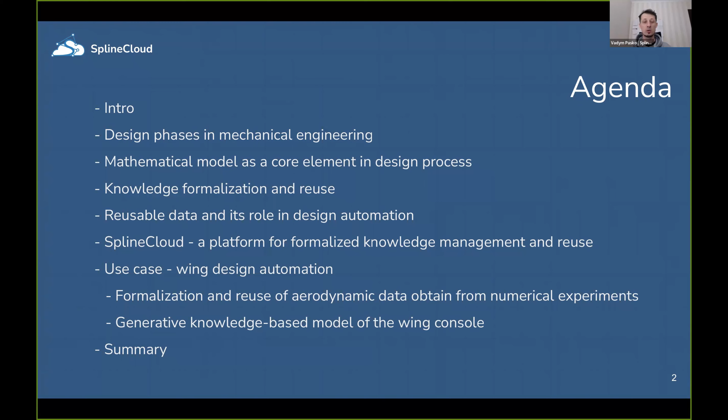Let me first speak a little bit about myself so you have a better understanding of who I am and why I'm talking about this today. My name is Vadym. I have experience as an aerospace engineer. I was working in the state design office Yuzhny for 10 years—this is the largest space company in Ukraine. I was always working on conceptual design phases, involved in numerous projects, from unmanned aerial vehicles to aircraft, space launch systems, to lunar landers. I was also involved in exotic topics like the space elevator, and many more. So basically my career was always related to conceptual design.

Conceptual design is when you turn an idea into a digital prototype. From my experience, this problem is really not trivial to tackle, because there are no standard ways to conceptualize your ideas—there's always a high weight of creativity here. At the same time, there are some patterns that, when used efficiently, can simplify this process. This is what I will talk about today.

Let's focus first on the very global aspect of things: design phases in engineering. Especially when we talk about conceptual design, because there are later phases—design for manufacturing, product lifecycle management, and other things we will not cover today. We are focusing more on conceptual design—when we turn an idea into a digital prototype.

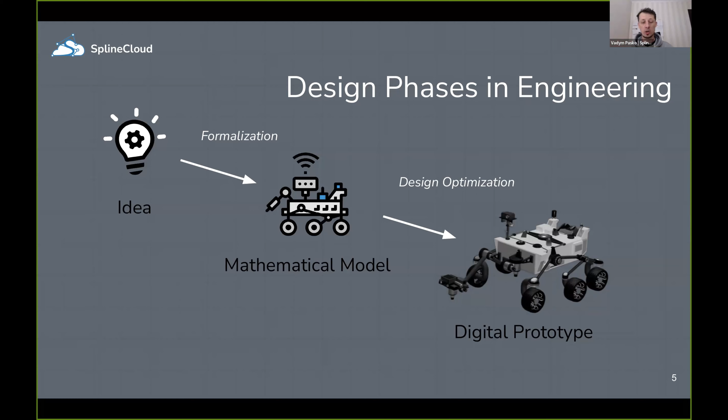So it is very important that we focus on the mathematical modeling process and make correct mathematical models that answer main design questions. So what is mathematical modeling in engineering essentially? You may think of a mathematical model as a set of equations on paper, but we live in the digitized world, and usually now we think of a mathematical model more as computer code.

So we incorporate existing knowledge from different domains, best practices, our experience, data on material specifications, some experimental data. All this we collect to derive a mathematical model. And during this process, we usually face the need to discover new knowledge, which in engineering always happens through experiments, either numerical or physical. There is also a share of statistical data that we can incorporate into our mathematical models, but I will not focus on that today.

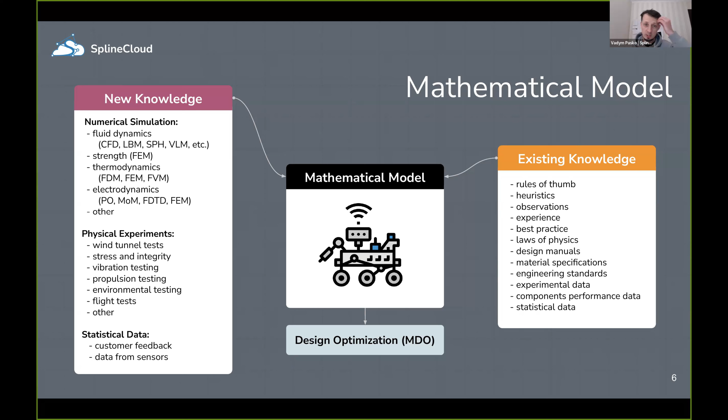So the idea is that when we don't know how some part or system behaves, we go and decide to conduct either a physical or numerical experiment. And this new knowledge also has to be incorporated into our mathematical model to amplify it and add the required data. And this mathematical model, once we have defined it, we can use it for the design optimization process.

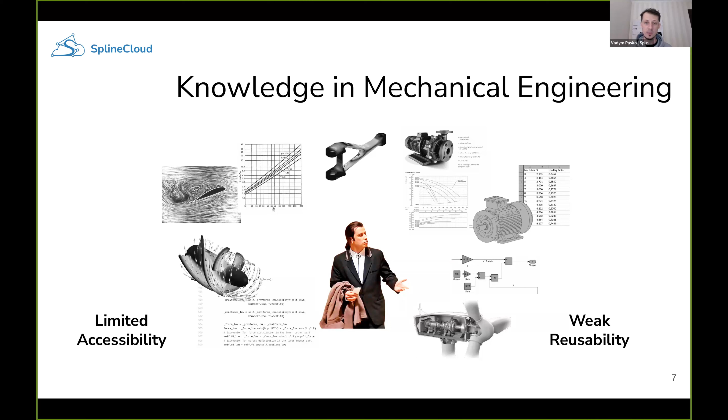But in engineering, it happens so that knowledge comes from various sources and in various forms. And you can really get frustrated by how to convert all this knowledge into mathematical models. Engineering software that we currently have complicates this process because of proprietary data formats and closed corporate ecosystems. We can say that, in contrast to other domains, engineering knowledge lacks accessibility and has weak reusability.

But to understand this, what is reusability, right? We should understand the process of how we can transform knowledge into a mathematical model. This happens through the so-called knowledge reuse process. So there are two general types of knowledge: it's either explicit knowledge or tacit knowledge.

It's knowledge in engineering. Explicit knowledge is simple: it's either laws of physics, design manuals, some engineering standards — something that has a written form, something that has already been covered in some documents. While tacit knowledge is something that wasn't really covered. It's based on our observations, our experience, some best practices in engineering, perhaps.

But in order for us to make a mathematical model, we need to convert all these types of knowledge into reusable formats. And these reusable formats have clearly defined properties. There are only three possible forms of this knowledge: it's either data, functions, or algorithms. You may think of functions as being part of algorithms, but I explicitly excluded these because functions can be inherent to data.

So we can find out relations in data and convert it into functions. In this way, functions are something that stand out from data and algorithms, in my perspective.

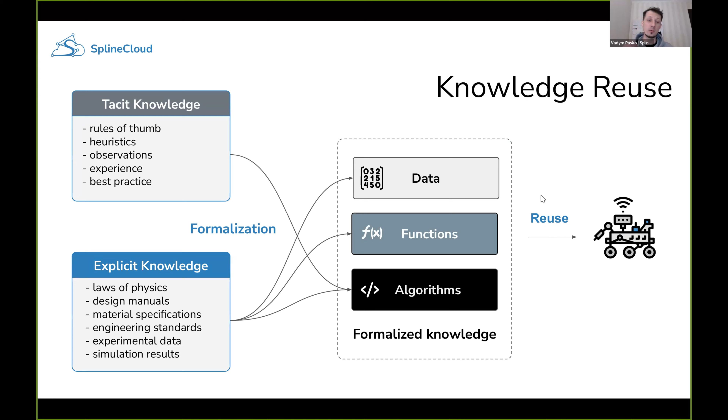But first, let's take a look at the formalization process and knowledge formalization. In engineering, there are generally two types of sources of knowledge: either experimental data, simulation results, specifications of properties and materials — these things we can convert into data sets and functions. So with this process, we extract data and formalize it, attach metadata description to that, and usually this data says something about the relations, how one parameter relates to another.

And the ideal case is when we extract not only data sets but also functions between parameters, because they are more reusable in our mathematical models. On the other hand, the knowledge that represents design methodologies, some best practices, and advice on what materials to use in which cases, this can be converted into algorithms.

So we can define algorithms based on these practices, how we can approach design. And with new tools like ChatGPT and other AI tools, we can be more efficient in this process.

I personally used ChatGPT to develop mathematical models, especially when I was new to some problem. I asked it to extract domain knowledge and create a mathematical model for me as a set of equations, then asked it to create Python code for that. I was amazed how fast it converged to things I later discovered in handbooks. So I welcome you to explore this possibility, but I'm sure you're already familiar with that approach.

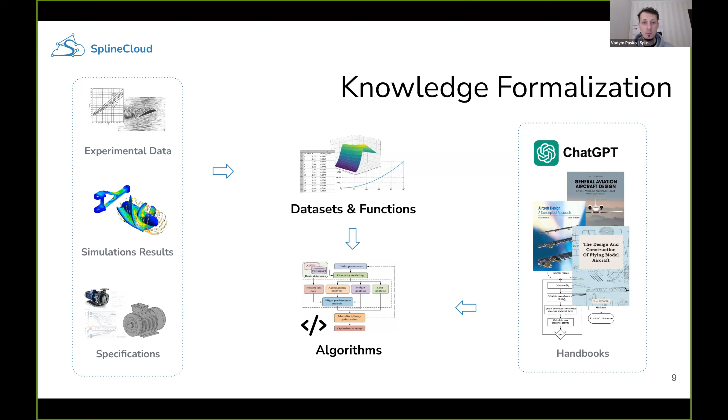So you may have seen such projects, I have seen such on LinkedIn. And there is one concern about this approach: the abundance of data and the state of that data. This is why reusability of data is so important here, so we not only facilitate ourselves but also facilitate AI agents to be more efficient when we have reusable data. But what is reusable data?

Generally, when we speak about reusability, we also mean other things: findability, accessibility, and interoperability. There's a term, FAIR, which covers all these things, but the last word in this term, reusability, is something special, because findable and accessible are well defined, so you can apply them for many different domains of knowledge and different data.

Interoperable depends on what the data itself is, but at least we can say some basic data formats are considered interoperable. But reusable is something really specific to the domain of knowledge.

And by reusable in the mathematical modeling process, which we are really focused on today, we should say that reusable data is something explainable, well documented, clean, where we can trace ownership and version history. Most importantly, it is automation ready, meaning this data should be placed on some resource that allows us to build automatic pipelines to write code that retrieves this data efficiently, retrieving clean data.

And to understand this, on the contrary, we can say what is non-reusable data. We can think of data on hard drives which are not accessible, meaning they are really hard to reuse. We can think of corporate databases with limited access, or proprietary formats, maybe even binary formats that we don't know how to open or integrate with other services.

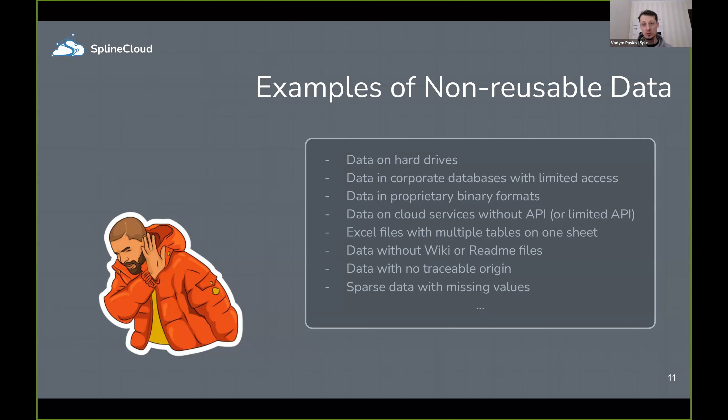So all these mistakes in preparation of data lead to limited reusability. And in engineering, especially if we talk about reusability and openness, we can think about open structure and open formats as the gateway to reusability. In software development, they actually defeated this problem, because they have open source, object-oriented programming, and GitHub.

GitHub is a platform that provides access to open source and provides tools to work with and integrate this code. But in mechanical engineering, things are a little bit harder. And this is something that we are trying to fix with SplineCloud.

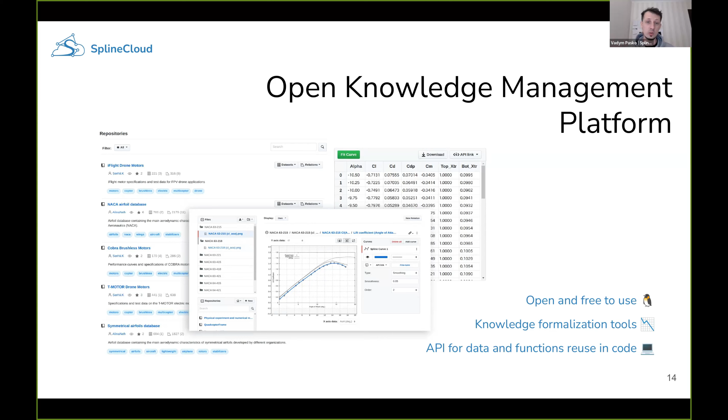So my team developed a cloud platform especially to address these challenges. When I talk about SplineCloud, it's an open knowledge management platform for engineers and scientists. It's open, and it provides tools for knowledge formalization and reuse in your mathematical models. With SplineCloud, you can create a repository, process data, and reuse it in your code using our API.

So when you work with SplineCloud, there's a very simple and basic pipeline: you create a repository for your data, you upload data from either simulation or calculations, and you define data sets. If your data sets are not clean, you can extract subsets of this data with our tools. And if your data is graphical, for example from research, or historical data from experiments, you can apply our integrated tool for data extraction from graphs.

After that, chances are high that your data represents some relations between parameters. So we provide a tool for advanced curve fitting, which helps you define models in your data. These models and data sets themselves, you can reuse in your code using our API. Currently we provide client libraries for Python and MATLAB, and we are planning to support other languages, so here we accept contributions.

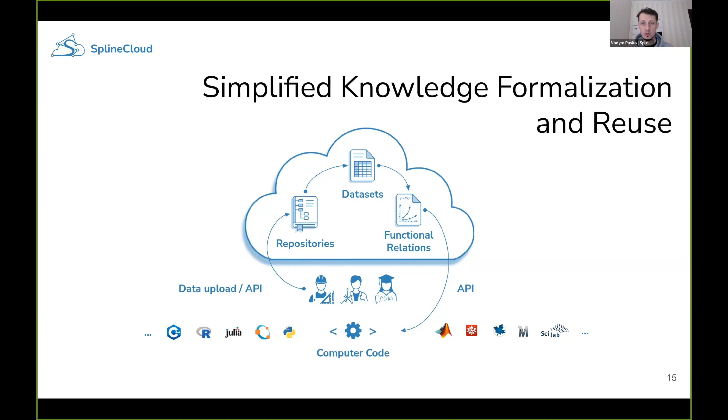So instead of speaking a lot about SplineCloud, I would like to switch to a use case to explain how it works, and how the whole process and the idea of reusability can transform your approach to design automation. In this example, I want to talk about the wing design automation process. This can be a wing of an aircraft or unmanned aerial vehicle. It doesn't matter much, it's more about how we set up this problem.

So I want to start with basic principles. Many of you are probably familiar with these, but I need to cover them to have a nice smooth path from the beginning to the final solution. As we know, the lift force and drag force are formed due to the airfoil shape. Because of the difference of pressure on the upper and bottom surfaces of the airfoil, we have this uneven pressure distribution, which provides lift and drag force.

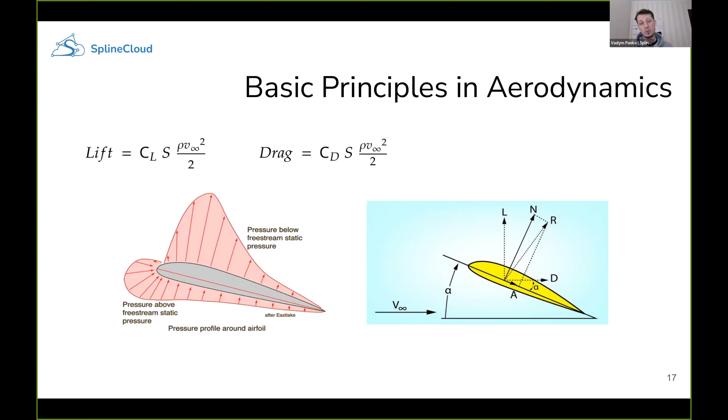Engineers came out with two coefficients for that. There is also a coefficient for pitching moment, but I just exclude it from this example for simplicity. So we have lift coefficient and drag coefficient, and these coefficients essentially provide us with information on how lift force forms. It depends on the velocity, on air properties, and more of that, it depends on the shape of the airfoil.

So when we design an aircraft, the shape of the airfoil is usually the number one question. What airfoil should we use for our wing? Because the wing is the main thing in the aircraft. And there are general recommendations on airfoils. For centuries, engineers created different types of airfoils, and now you can select from the whole range of these airfoils.

So there are general recommendations. If, for example, you're developing a high-speed aircraft, maybe long-range aircraft, you probably want to stick with low camber profiles. And if your target is an aircraft with high lift and low speed, probably you should take a look at deeper camber profiles. But the thing is, it's not the only information that we can use.

It's not essential enough for us to develop the aircraft, because we want to know exactly which airfoil to select. And because in engineering we face multi-physics problems, there is also a question regarding strength, regarding rigidity of the wing, and we have to account for this. All these wing profiles really depend also on the inner structure and materials that we use. And the only way to give the right answer for which airfoil we should use for our aircraft is to go through mathematical modeling.

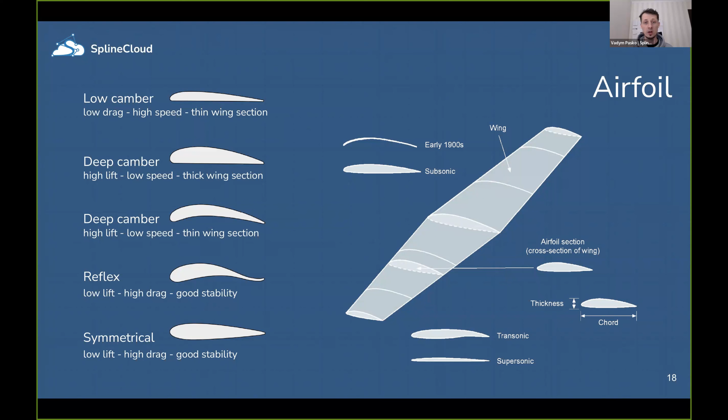When we model a specific airfoil, we model the internal structure, we solve some equations, we consider constraints, and we come out with the optimal solution. And to do that, we need to process some data. So as for the airfoils, we have data on airfoil performance. This data was obtained over many years from wind tunnel tests and from simulation.

We have nowadays open software that provides us with the ability to calculate these properties for airfoils, and there are resources that already have this data, for example airfoil tools. You're probably familiar with this resource if you have ever had experience designing aircraft. The thing is that processing this data, collecting this data, is mundane work, so you have to spend some time. For example, with airfoil tools, you have to download those data sets, you have to process those data sets.

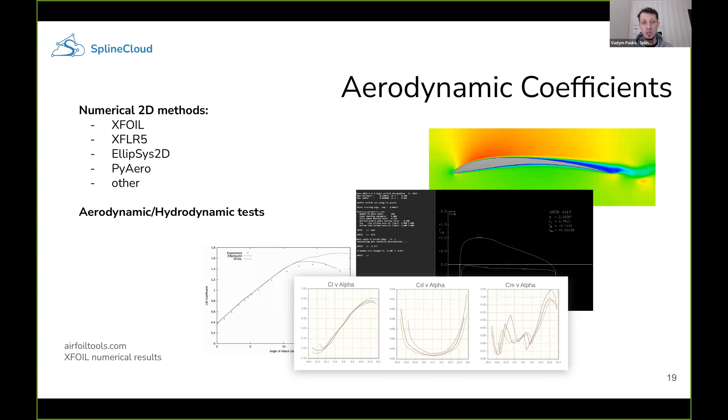And you have to build collections, create folders with those things. This goes through a data management process, which is not very pleasant work to do. At the same time, once we have this data on SplineCloud, you will see how it simplifies the work in design automation.

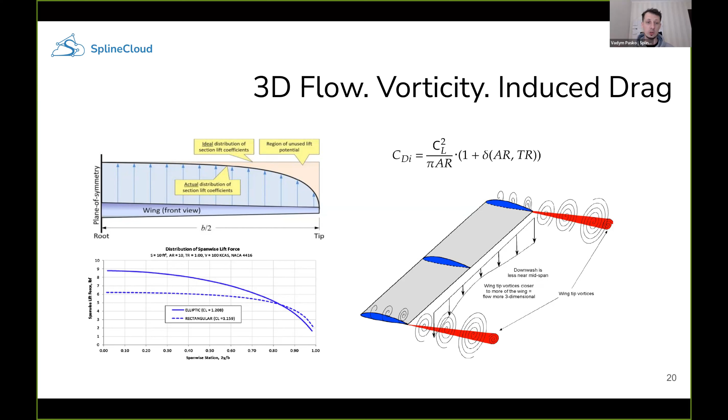But data on airfoils is not enough for us to go with, because we know about 3D effects, we know about the vorticity of the wing, and we know about this wing load curve that tells us how the actual lift coefficient drops because of these vorticity effects. And this effect also produces so-called induced drag, so we have to account for this in the real case. To understand how we can calculate this drop of lift coefficient, we want to understand what is the planform of the wing, because the planform of the wing impacts our aircraft significantly.

Similarly to airfoils, engineers came out with numerous shapes of the wing planform, and there are general recommendations. If you're designing a low-speed aircraft, you probably will want to use a rectangular wing, which is the simplest form but not the most efficient one. If you're racing for efficiency, you may want to use elliptical wings because they produce the lowest induced drag, but they complicate manufacturability of the wing.

So we have straight planforms, swept planforms, and tapered wings, which is just an approximation for elliptical wings. If we design high-speed aircraft, we may use swept or even delta wings, and especially if we care about controllability and maneuverability, we may incorporate some sweep angle. But we still want to know exactly what planform we should use, and we don't have this answer because we don't know the rigidity, flexibility, or mass of the wing.

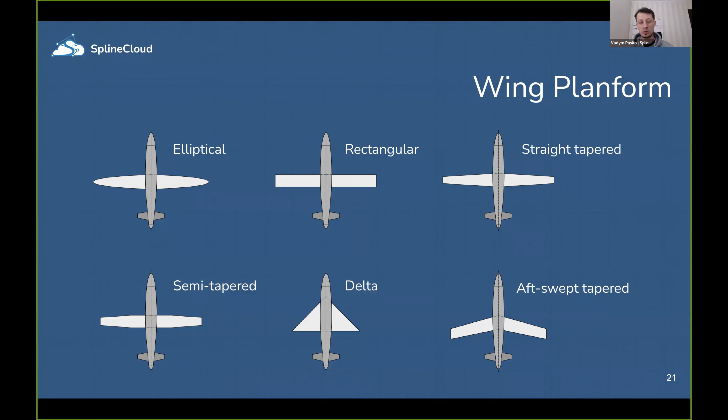So still we need to go through this mathematical modeling process. When we start looking in the literature trying to find out the function of lift distribution along the wingspan, we discover that two parameters influence this mostly: the wing aspect ratio and the wing taper ratio. The aspect ratio tells us how long the wing is compared to its root chord, and the taper ratio tells us how the tip chord is smaller than the root chord. So we have this kind of shape.

But when we try to find the empirical formula for this, we may fail because there are so many things incorporated in these lift distributions that you may end up with nothing. You may find empirical data on rectangular wings, but for some complex wings, it's really hard to find empirical data that you can rely on.

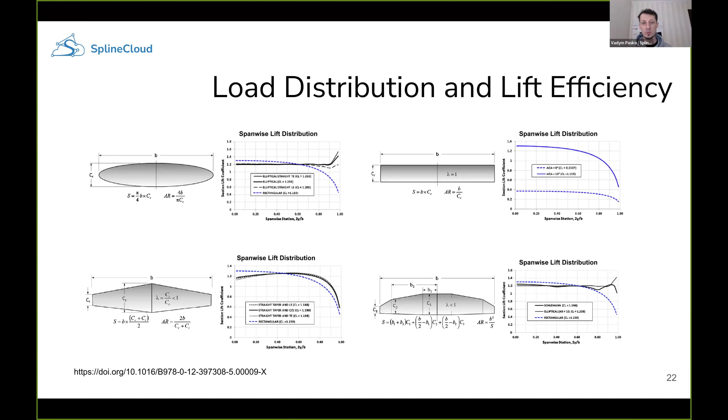This is when we come to the idea that we need to perform some numerical analysis, maybe run some CFD analysis. This comes to the question: what CFD tools should we use? Should we rely on heavyweight software that incorporates finite element methods and solves Navier-Stokes equations? Or maybe it would be enough to use some lightweight, open software. It really depends on how much attention you pay to the tolerance, how exact a model you are building.

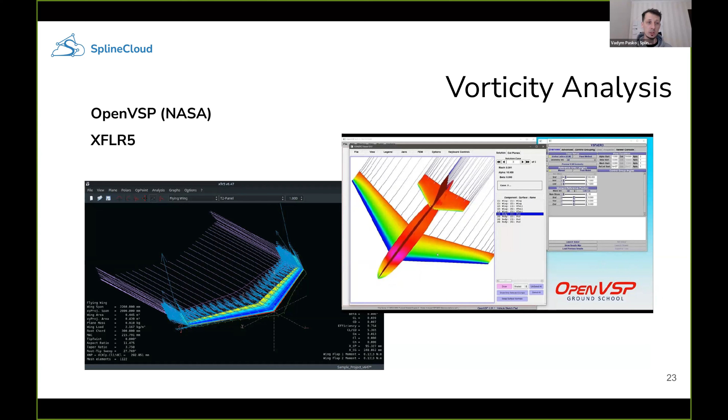In our case, we already made some assumptions, and you will see new assumptions that we will make. Making these assumptions leads us to the solution that probably we don't need heavyweight CFD solvers, so we can stick with something simpler but reliable. These are two tools you can use: OpenVSP, open source software developed by NASA, and another open tool called XFLR5. I haven't used the second one, but I used the first one.

Even these lightweight tools incorporate methods. For example, OpenVSP incorporates panel method and vortex lattice method. They are really simple and converge incredibly fast compared to finite element methods, so it just takes seconds for convergence, but still we have to waste some time. Get ready for some handwork: setting up the model, setting up the speed, and especially processing results, because even using these fast converging methods, I spend more time on processing results.

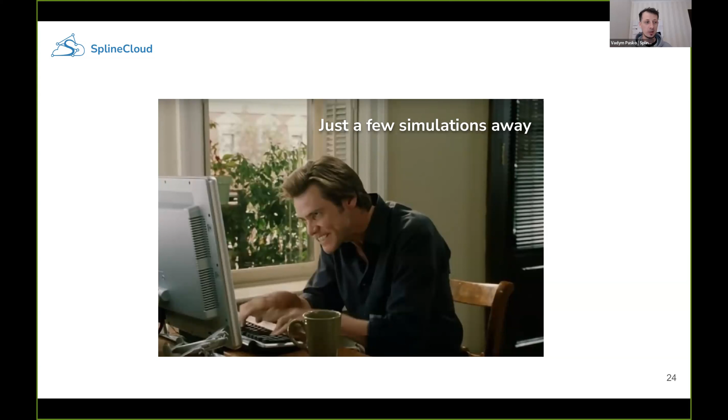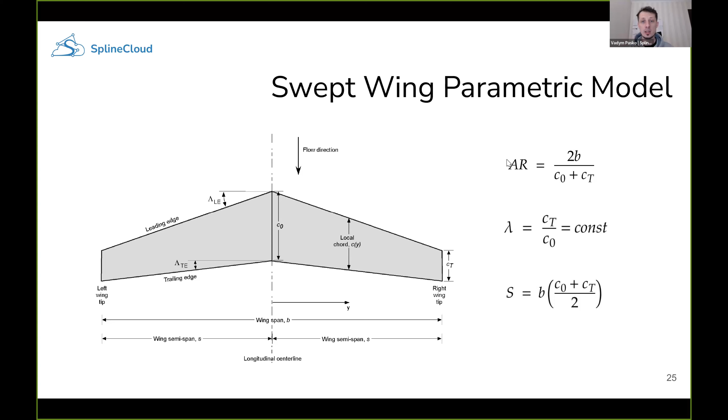The thing is, when you look through the literature, you find that the taper ratio should be somewhere between 0.6 and 0.8 to have minimum induced drag, so there's not much reliability in this term. I decided to go with a constant taper ratio just to relax this additional variable in our system. So in this problem, we will vary the aspect ratio and the sweep angle of the wing, and try to find out what the lift distribution function actually is for the wing. For this I proposed we use OpenVSP, and I used this for this example. Here I made some new assumptions and simplifications, just for this demo purpose.

You can use your own setup for your task, but for this task I used no geometric twist, meaning that root chord has the same angle of attack as the tip chord, so there is no twist in the wing. There is also no aerodynamic twist, meaning root chord has the same airfoil shape as the tip chord, just a greater scale but same shape. And as I said, we used a constant taper ratio.

One thing I try to exclude from this simulation is the influence of the airfoil, because we want to go through different airfoils. So in this setup, the result is not essentially the lift coefficient, but the lift coefficient reduced by the airfoil lift coefficient. This way we eliminate the influence of the airfoil, ending up with a reduced lift coefficient.

So we end up with this function, which relates on 4 parameters. It relates on the point, on the coordinate of the wingspan. It depends on the aspect ratio, on the angle of attack, and on the sweep angle. This is what we can study, and this information would be more than enough for us to come out with our design.

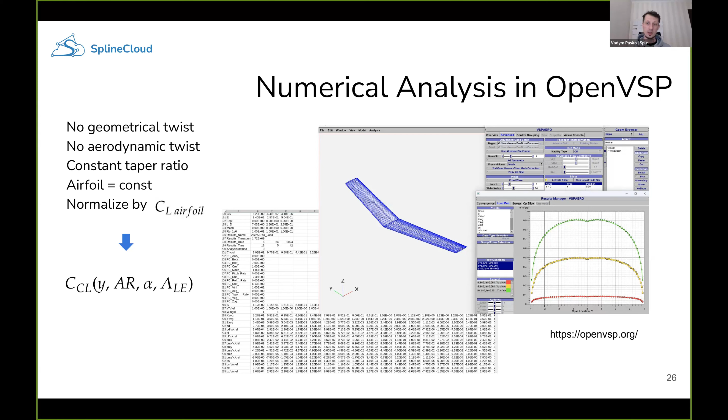You set up experiments, extract data, mark data with metadata, give names to data sets, and this is essentially the process of extracting knowledge and making it reusable.

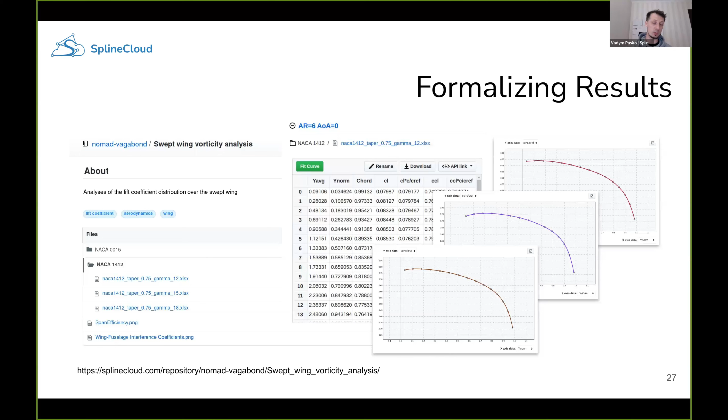For that, we can create a repository on SplineCloud specifically for our experiment, upload our data sets and data files, define relations, and build functional relations between parameters to understand how this drop of lift coefficient changes with wingspan for different conditions, different sweep angles, and different angles of attack. This repository lets us integrate these results into our mathematical model.

So once we have these relations, each has an ID on SplineCloud, and we can use this ID to construct a collection of these curves, these efficiency curves of the lift coefficient.

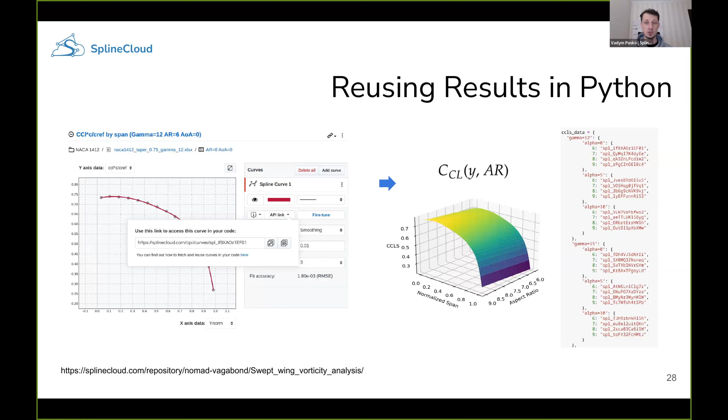Once we construct this collection, we can build two-dimensional functions, so-called response surfaces, which will be used as a function in our code, in our process of automating design and design optimization. So we have this two-dimensional surface which we can instantly evaluate for any point on the wingspan and for different aspect ratios to understand the drop of lift coefficient.

Once we have data on airfoils, we can either find this data - there are lots of resources for open data, and you can already find some repositories with airfoils on SplineCloud - or you can go the same path, use the same approach, and create a collection of airfoil data, which tells us how the lift coefficient depends on the angle of attack.

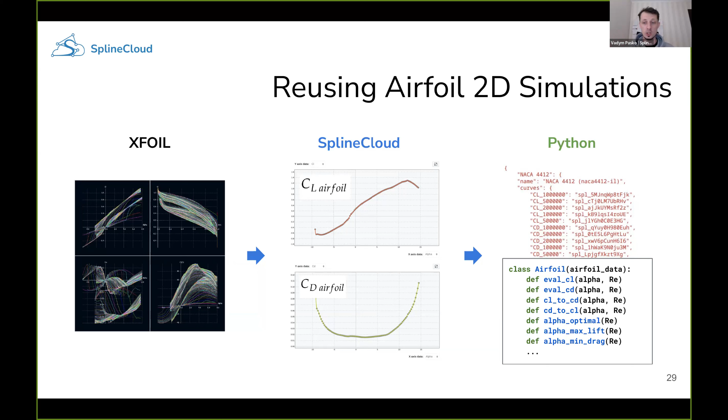We can create a class of airfoil in our Python code to evaluate the actual lift coefficient and drag coefficient depending on the angle of attack. And now we can combine our results.

We can combine and multiply these curves - the curve for ideal lift coefficient for the airfoil, and the curve for the non-ideal drop of this lift coefficient - and build another response surface, another two-dimensional function, which tells us what the actual lift coefficient is depending on the wing coordinate and the angle of attack.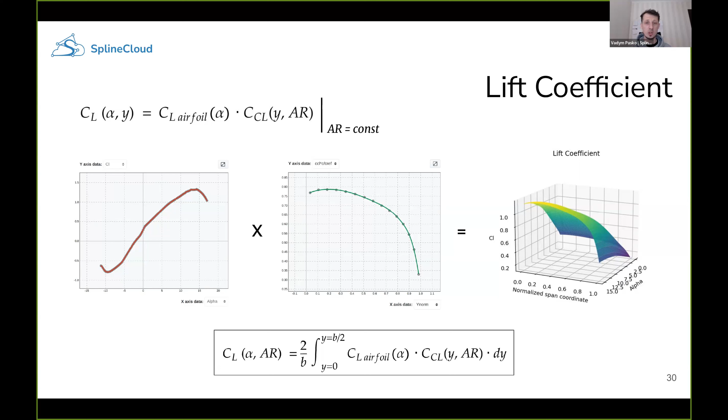For example, if we set a constant aspect ratio, we can create a collection of such response surfaces for each aspect ratio. And of course we can go through numerical integration to calculate the cumulative lift coefficient for such surfaces, and so on. We can also end up with three-dimensional and four-dimensional response surfaces - it's just a matter of taste how you perform this, though with three- or four-dimensional surfaces it would be harder to visualize them.

But yeah, another component is the drag coefficient. With drag coefficient we can go with the same strategy, with a little difference: we can go to literature and find the formula for drag coefficient. This formula contains the span efficiency component, delta. There is an article referenced for this slide that you can use, a great article providing an overview of different empirical approaches to calculate the drag coefficient.

From this article, I essentially extracted this graph, uploaded it to this repository on SplineCloud, and used a plot digitizing tool to extract data points for each case, then applied curve fitting to reconstruct this relation. Now we have the ability to extract knowledge from these graphs and convert it into reusable form, into a two-dimensional function in our code, which tells us how this delta coefficient depends on the taper ratio and aspect ratio.

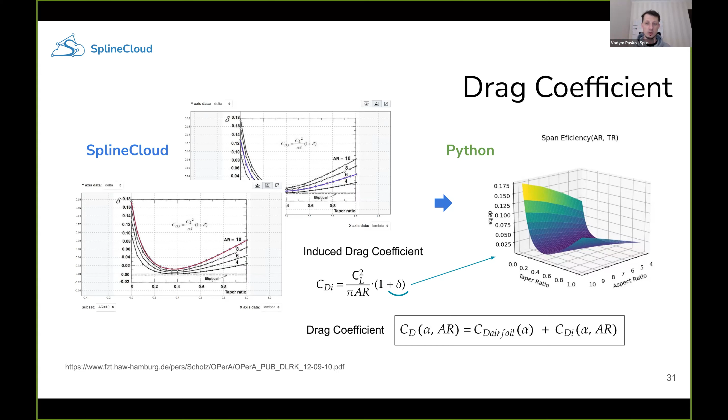Later we'll use it to calculate the total drag coefficient, which is a combination of airfoil drag and induced drag. In this way, we now have clearly defined all functions we can use to answer what the lift distribution on the wing is, and what the drag force acting on the wing is.

With these functions, we can now vary many different parameters. We can vary airfoils, angle of attack, sweep angle, and aspect ratio. For each case, we can instantly evaluate the lift force and drag force, and we can also get the relation of the lift distribution on the surface of the wing.

But this is not enough for us to answer our main design question, because something is missing. What's missing is data on the wing structure, on the materials, on the wing console mass, and other things. So here is the basic setup of the mathematical model.

We can consider our wing console as a cantilever beam loaded by two net loads: one is the aerodynamic load, already clearly defined in our code, and the other is the gravity load. For this load, we need some data from the wing model, and for this we need a CAD model of the wing.

What's important about this CAD model is that it should be adaptable, instantly adaptable for each airfoil, for each geometry.

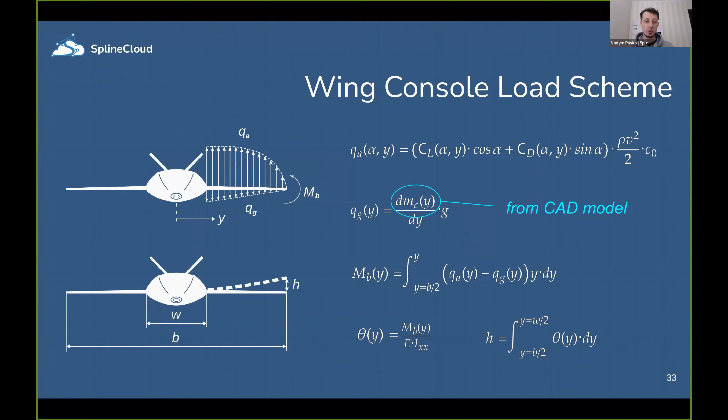Probably you can use some CAD engine and an API for it. For example, if you're using SolidWorks, FreeCAD, or something else, you can use an API for that. But setting this up would take a bit of time. Instead, I propose using the library for Python called CadQuery.

This is actually the interface for the Open Cascade CAD kernel, which is a popular open source, probably the only one based on B-splines, and an industry-grade CAD kernel used in many software, especially FreeCAD. CadQuery is a simplified interface for this CAD kernel, and it has a Python interface, so you can use it to create 3D models programmatically.

With this setup, you can retrieve console mass, make slices of the wing, perform numerical integration, and do many things. You can calculate the wing section moments of inertia. So you can do many geometrical things that are not available without that.

For this example, I want to take a look at the wing structure of this kind. You can imagine any structure of your own. If you want to repeat this, you may end up with some longeron structure, classical things, but this is something from the previous project that I was studying.

I was looking into the internal box structure, so our wing console has a rigid box inside. It can be a carbon composite box, a fiberglass box, or even an aluminum box. It doesn't matter—the thing is that this is a rigid element, and we only account for this rigid thing as the element of strength in our wing model.

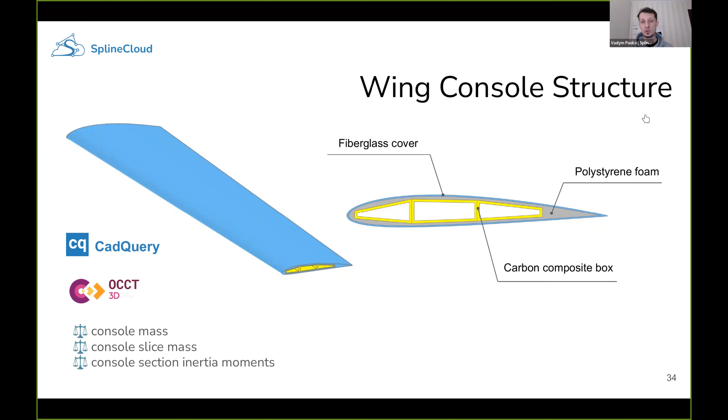We have other bodies that we won't account for strength, but will account for mass: the shaper, the outer shaper. It can be polystyrene foam or some other foam, and there may be some kind of cover on top just to protect it from damage, maybe a fiberglass cover or something else.

Once we have CadQuery and SplineCloud, we can write a little bit of code and create this class for the airfoil section, which will be adaptable for each airfoil. We can define rules for how the internal box will fit into any airfoil, and run through this because we can load data from SplineCloud, create a collection, integrate it in this class, and iterate through each airfoil.

Most importantly, not only is aerodynamic data available on SplineCloud, you can also define the contour of the wing as a spline and load it into your code, so you don't even have to do fitting in your code to reproduce the shape of the airfoil, because the shape of the airfoil is already defined on SplineCloud.

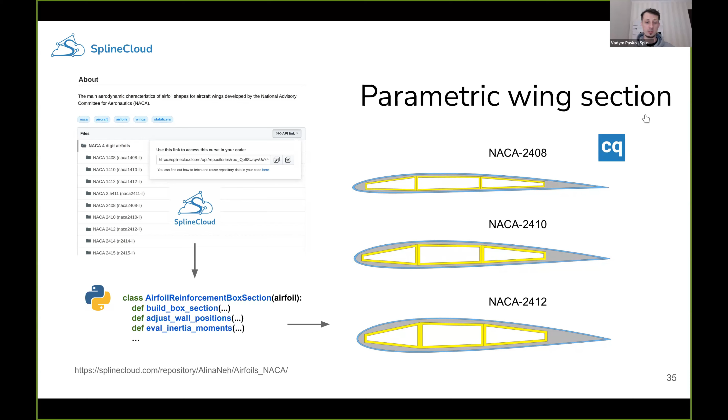Once we have this section class, we can go through setting up the whole knowledge-based model of the wing, meaning we have the 3D geometry. We have methods for calculating lift, drag, and lift distribution. We have methods to assign materials. We have methods to calculate mass of this console, mass of sections, and we can define methods to numerically integrate those forces and solve for rigidity and flexibility of the wing, using simple formulas from the strength of materials.

This model will allow us to iterate through different designs in the range of our defined design parameters and find the optimal solution much faster than it would be done with manual work. Compare doing this manually with a classical CAD system, going through numerical simulation on each iteration, multi-physics simulation, solving for strength, solving for aerodynamic load. It will just take you weeks or maybe even months of work.

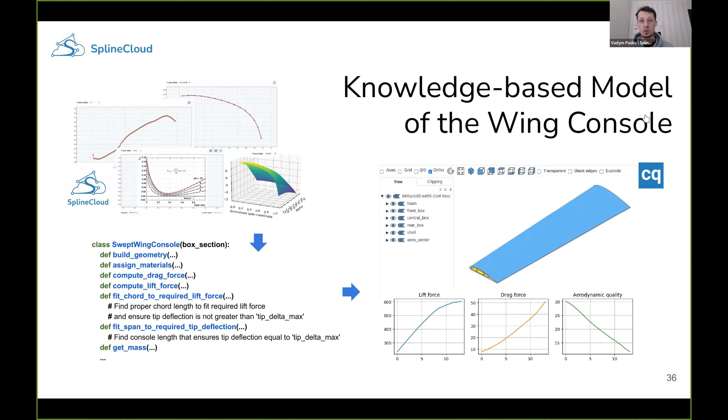So with this knowledge-based model, this is a simplified model. It doesn't account for many effects, but at least with this model you can iterate through hundreds of designs in just one or several hours instead of weeks or months of hard work. This is the beauty of the knowledge-based engineering approach, and it gives us the opportunity to optimize design, to come out with the optimal solution.

I will not speak much about optimization today because it's a really interesting topic. Design optimization, multi-physics optimization, is really interesting, but it goes beyond this webinar. I just want to give you a taste of how we can approach solving the geometry for our requirements with this knowledge-based model.

Essentially, we can define two nested functions. One internal function defines the strategy to fit the wingspan to the required tip deflection, so we can gradually increase the wingspan until the tip deflection is 10%, for example. The external function will vary the chord of the wing, repeating this iterative process of the internal function until we have a wing of the area needed for our lift force, with the same tip deflection that we defined. This is how we solve geometry for required parameters.

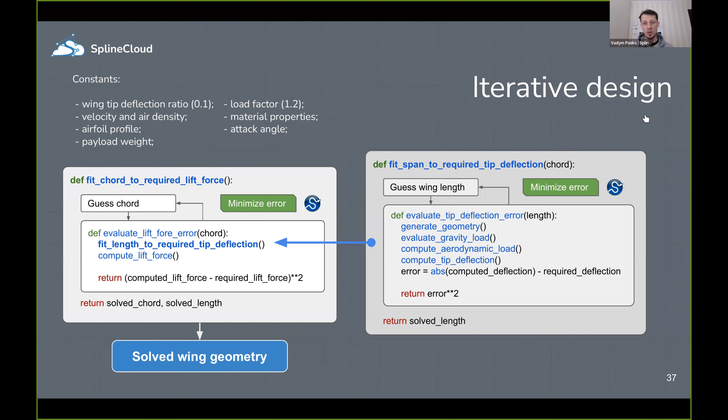Of course, we can define different strategies for our optimization. It's up to you how you solve and approach this problem. This is the beauty of it, because once you've defined this model, you have the source code for it. And if it's open source, somebody else, or maybe you in the future, can adapt this model, include some new knowledge, some new ideas, and improve it gradually. So over time, you end up with a more detailed, more accurate knowledge-based model.

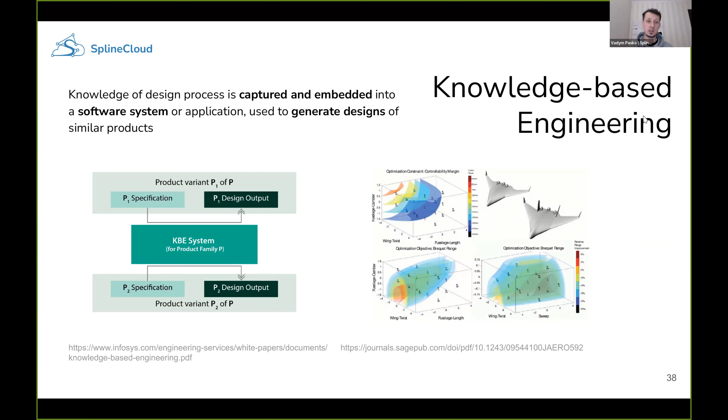But what is knowledge-based engineering itself? I've been speaking a lot about this, but essentially this is not a new technique. It's an old thing that was very popular in the 80s and 90s, and the beginning of the 2000s. Basically, it's a philosophy of building such systems, such approximations, but very detailed approximations, with CAD engines.

The idea is that we define a knowledge-based model in order to allow us to forgive some things that we don't know about the system, but at least solve for the main properties that we have, and essentially enable design optimization. So knowledge-based engineering is essentially about building an expert system, writing some code to answer the main design questions, and iterating through many different designs.

The knowledge-based system consists of two main components, and this is critical for understanding the knowledge-based engineering model: the model and the knowledge base. They should always be separated. Why? Because once you include knowledge inside your knowledge-based model, it becomes not reusable, because once you incorporate all this data fitting, curve fitting inside your code, you may end up with a solution that's not scalable, and you don't have the ability to transfer it to different models. But once you have a knowledge base which provides these external functions, you can iterate through them and apply this knowledge to very different knowledge-based models. This is the idea of scalability.